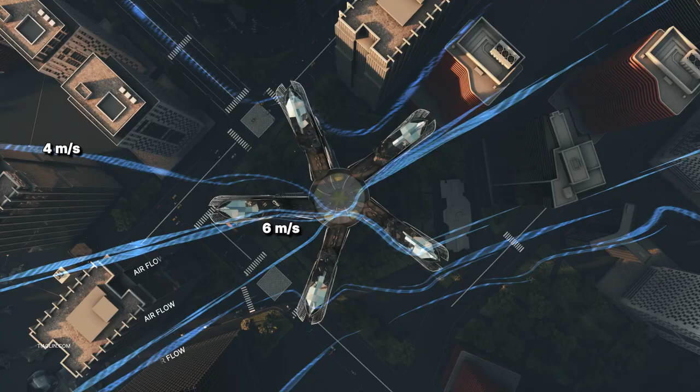A new type of green energy source: a building capable of supplying itself with electrical energy from the wind. The object controls the currents of the wind and converts its kinetic energy into electrical energy.

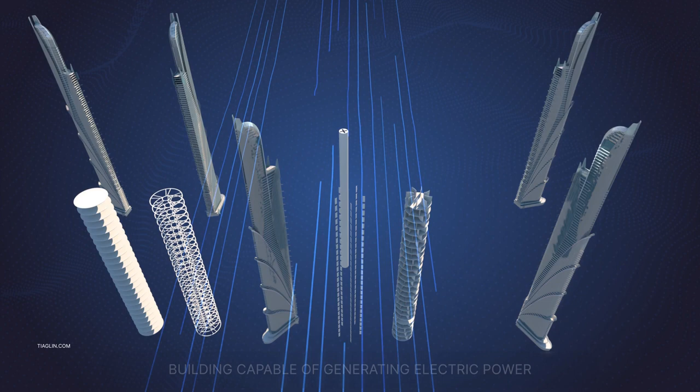Let's look at the basic and necessary building elements to generate energy: air currents, static axis, rotors, aerodynamic shields, buildings, frame every 3 floors, and generators. Now we will assemble the building sequentially.

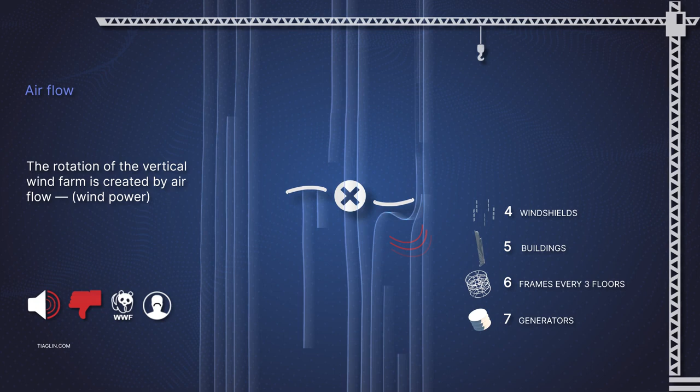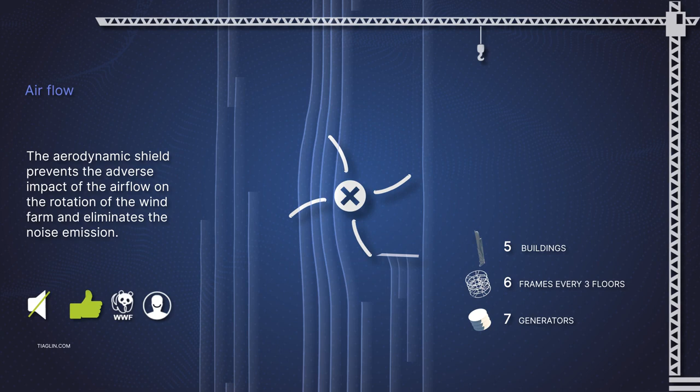The vertical wind farm rotation is created by airflow, for example, wind. The aerodynamic shield prevents the negative impact of the airflow on the rotation of the wind farm and eliminates noise exposure.

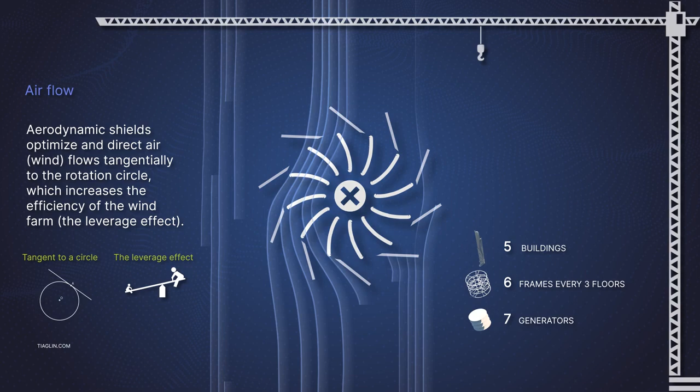Aerodynamic shields optimize and direct the airflows, wind, at a tangent to the rotation circle, which increases the efficiency of the wind farm, the so-called leverage effect. Performance does not depend on the direction of airflow.

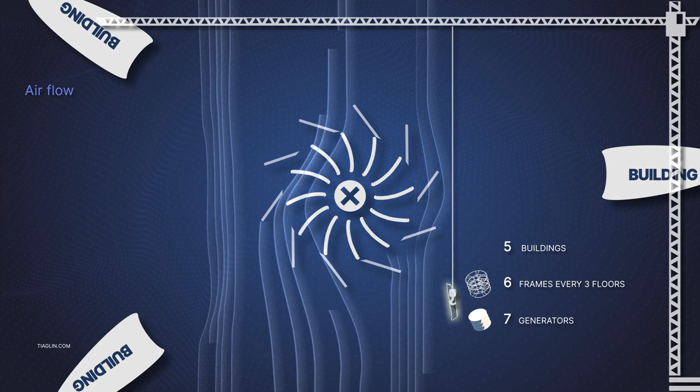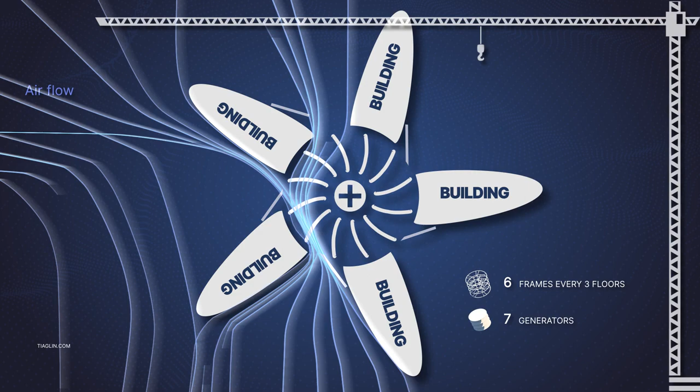The concentration of airflow is created by streamlined structures, lined in the shape of a flower, which form a building, giving the whole structure of the installation a monolithic architectural form.

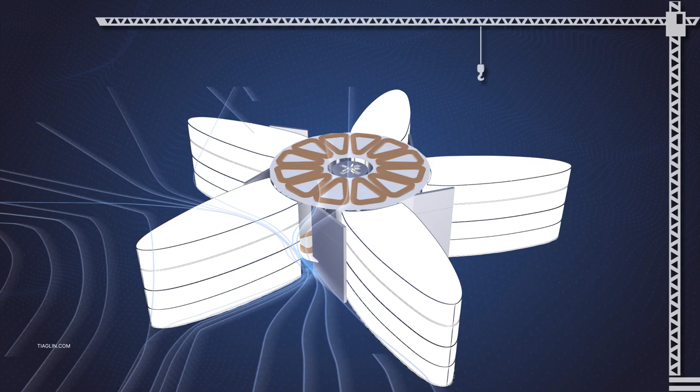Possibilities of application: residential spaces, office spaces, vertical hydroponic farms.

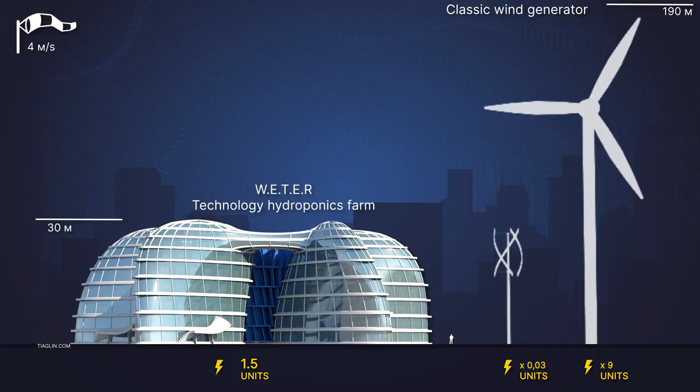Let's look at the advantages of W.E.T.E.R technology over classic wind farms. The W.E.T.E.R building harmonizes with the existing buildings and the environment. Safety: the low-speed design in the W.E.T.E.R project ensures that there is no noise, no infrasound.

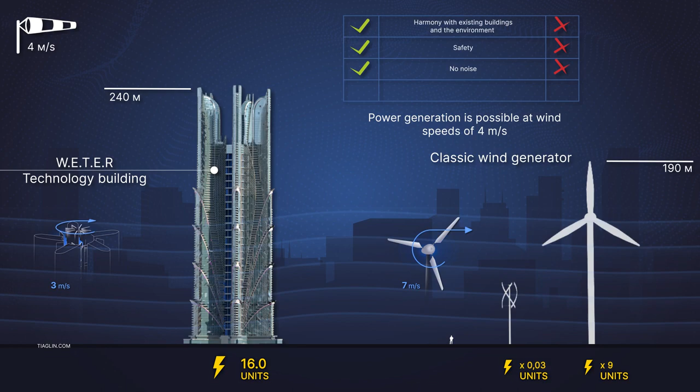Power can be generated at wind speeds of 4 meters per second. Possible building height of over 190 meters. Possibility to integrate various types of energy storage harvesters.

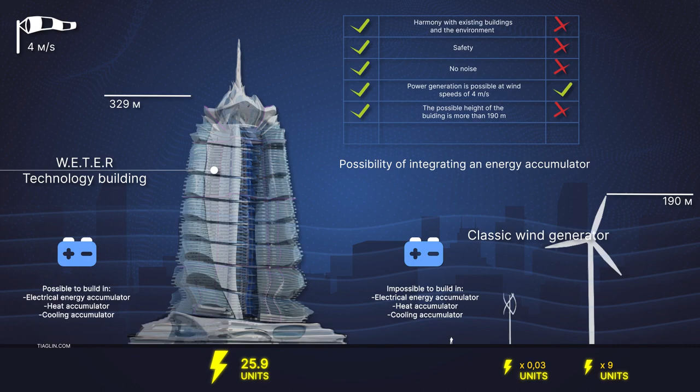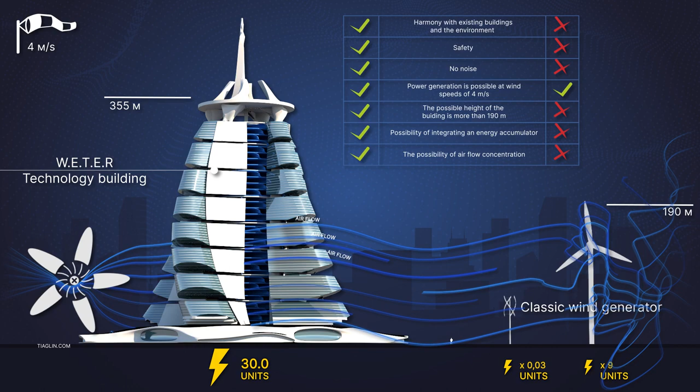Possibility of airflow concentration in contrast with classic wind farms. Large area of the blades means more energy. Direction of airflow at a tangent line to the rotation circle of the blades means more efficiency.

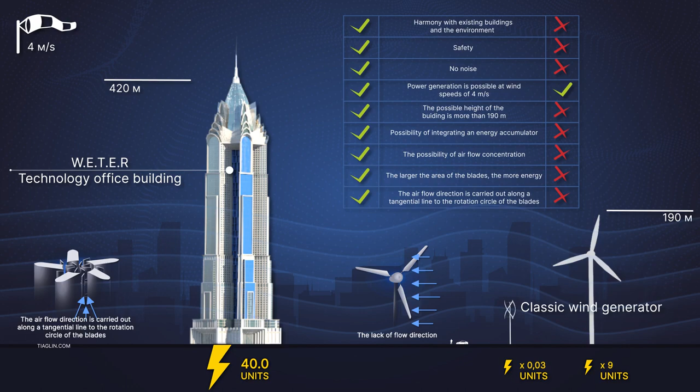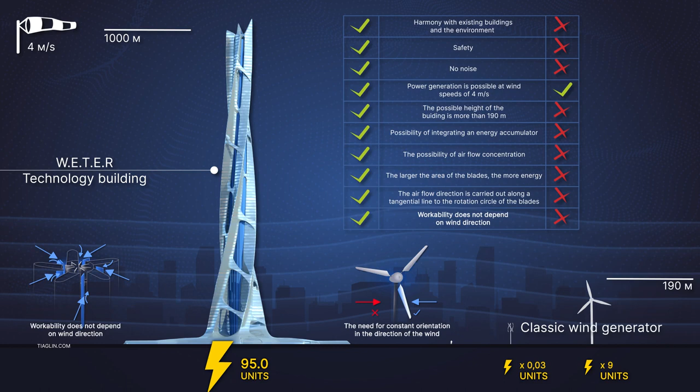Workability independent of wind direction. Speed of rotation: 4 to 7 RPM. Vibrations are excluded. The energy industry is ready to take a step into the future.

This was the statement with which the experts of the international forum called Technoprom started the discussion. Dennis Tiaglin, inventor: There is an analog, the Pearl River Tower building. It provides itself with 10% of energy, and our building provides itself completely.

Gennady Tumanik, Professor, Doctor of Architecture: I think that's a big opening for you. It has to be developed. It's a very promising area. I think that you will definitely get support from those specialists who understand what this is and what it may become in the future of urban planning, architecture, energy supply, in solving global technical problems of modern times. So I congratulate you. Thank you.

Vasily Fomin, Doctor of Physical and Mathematical Sciences, Academician of the Russian Academy of Sciences: Here is the initial idea, and it's a very good one - to make the wind move inward, that is, the air flows around this building. The building is made in such a way that the wind from either side gets there to the wind turbine. The rotation is further transmitted to the machines, and then the energy is generated. This axis is stationary. The wind turbines are independent.